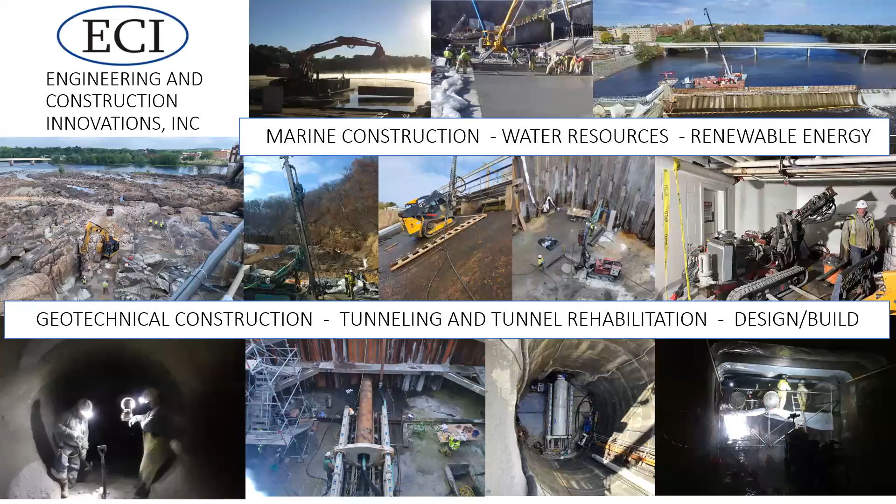So our presenters, Kurt Breitenbucher is a registered professional engineer with 11 years of experience. He received a BS in civil engineering and a master's of science in geotech engineering from Michigan Tech. He primarily works in trenchless projects, tunnels, and supported excavations across the country. Based here in Minneapolis, he's been with Brierley for about 7 years.

Sam Umlauf started his career in the construction industry working as a field inspection intern in central Wisconsin. After stops in California and North Dakota, he settled in Engineering and Construction Innovations, Inc. at the end of 2014. His focuses while at ECI have been design and construction of specialty geotechnical, marine, and tunnel projects with a basic intro to soil mechanics as his only formal, quote, classroom geotechnical education. Sam's geotechnical and geostructural expertise has primarily involved rolled up sleeves and dirty hands. So here, guys, please give it up for Kurt and Sam.

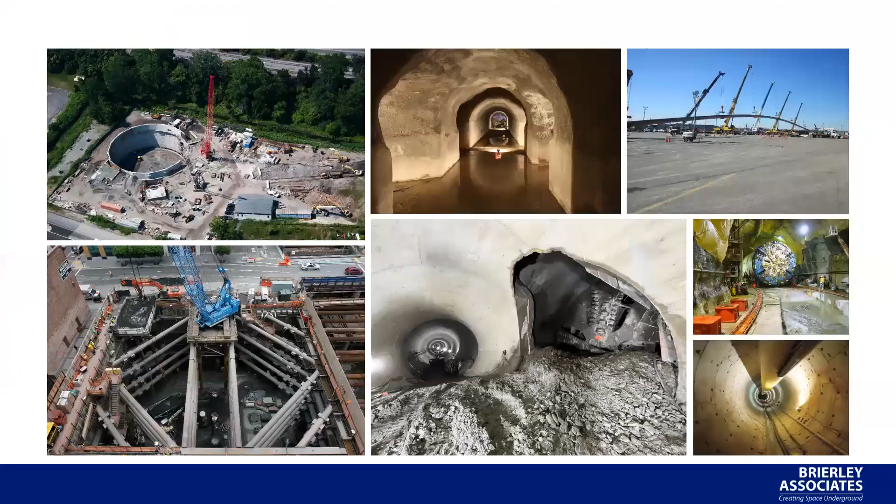I'm Kurt Breitenbucher, Brierley Associates. I was just asking Todd and Tom. They have been here in the Twin Cities about 10 years now. As they mentioned, I've been here about 7. We do a lot of the same things ECI does, but on the design or CM side. And once again, I won't go through all the pictures with you. We'll get to the presentation, but I just wanted to say it's great to see so many people out for the first one this year. So thank you, everyone.

So the title is the Upper Bee Branch Restoration Railroad Sanitary Sewer Interceptor Crossing, which is quite a mouthful. If you want to go to the next slide, it's a project that was born out of a much larger emergency project. The project team was ECI and Brierley. ECI did the construction. We were their designer. The owner is the city of Dubuque. I didn't put up a map showing where Dubuque, Iowa is. The owner's engineer was Strand Associates. I've got to give Eric Veith a shout out. He was great for dealing with submittal review, dealing with the railroad, dealing with the owner. He was fantastic. So next slide, please.

So the project background for this is basically, this is Dubuque. You can see here in the clay color, this is the Bee Branch watershed. It all drains down here to a series of channels, and then this is the Mississippi River. Okay, no worries. So, starting in 1999, they started to have incredible flooding throughout the area. They've had 6 presidential disaster declarations. It's up to $70 million in damage.

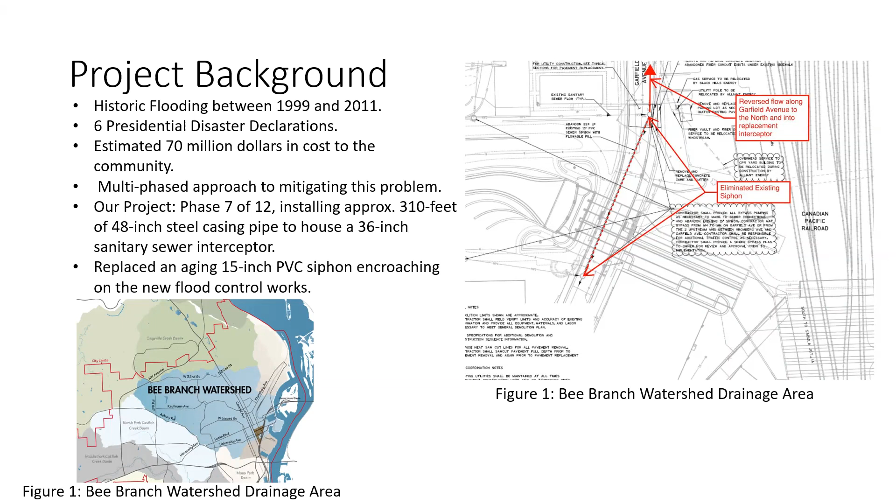It was about 310 feet of 48-inch steel casing pipe to house a 36-inch, was it Hobas? It was Hobas, yes. Hobas sanitary sewer interceptor. Next slide, please.

So just some of the project constraints. Again, this is the same site, but now it's the aerial. So this is one of those massive flood control structures that comes down through here, and then that other one is down here. The siphon would have been just through here. So we essentially reversed that flow, and the launching shaft, you generally want to tunnel uphill. So the launching shaft is going that way. So any sanitary flow will go that direction.

So you can see the launching shaft, 310 feet, built by slurry microtunneling. This is the receiving shaft. The image I was able to find, it had just been backfilled, but you can get a feel for what it was right before they fully abandoned it. So on the west side, we had Garfield Avenue that we had to keep open. We had this Canadian Pacific Railroad or Kansas City Railway facility, and you can see we tunneled fairly close to it.

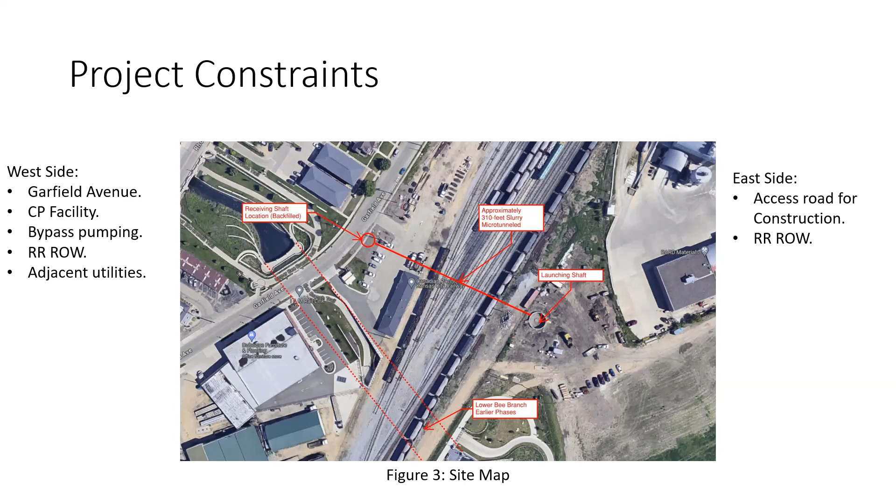Adjacent utilities, that's not uncommon. The railroad right-of-way, and then on the other side, it was actually pretty wide open. The only thing we really had to do was build a dirt road to get out to there. Next slide, please.

So one of the things that Brierley Associates did was, the contract documents required dewatering regardless of if you used it. So we designed dewatering. It enabled the ultimate design that we went with, which was a shotcrete shaft rather than a more conventional shaft. We had fine to medium grain sands, which is actually great for dewatering. The impermeable or cutoff layer was another 35 to 70 feet below us. So there was no way to toe in.

So we ultimately did seven 8-inch wells for the launching shaft and four 8-inch wells for the receiving shaft. We spaced them evenly. ECI drilled them in with a rotary drilling rig. They had 310 GPM pumps, so at 80% efficiency in the lifting head that we needed, they were all running at about 248 gallons per minute. And when I checked in with Austin, the field superintendent, he said most of them were pretty much going full tilt. So unfortunately, my caption is wrong there, but this is a cross section of the dewatering plan for the launching shaft, just to give an idea of it.

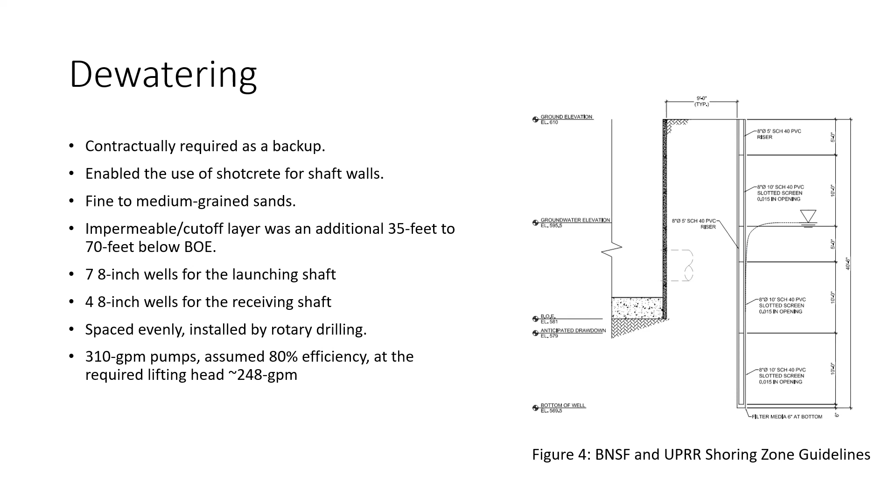Next slide, please. So one of the benefits of design was we avoided railroad review for schedule. We utilized the required dewatering, and there's another slide you might be more familiar with, but if anybody here is familiar with the railroad shoring zones, the first line is, I believe, zone A, second line is zone B. Zone B is you can do trench boxes, you can bench it, you can do whatever you want as long as it's safe. It's OSHA controlled in that location. If you cross into the other zone, you end up taking the full railroad surcharge.

So by going with a toe-less design, and again, you can see that this is actually the contract design, we were able to move the excavations slightly closer together. And I believe we cut off about 55 feet of tunneling. We brought it closer together. Next slide, please. So again, BNSF, UPRR shoring guidelines.

If you've ever dealt with them before, typically if you go into zone A, the one where you have to take the full surcharge, certain reviewers will make you treat it as a full distributed load for E80, which means if just the tip of your steel sheet piling goes in there, they say you have to put almost a 2 kip per linear foot, 2,000 PSF per linear, vertical distributed load on your shoring. So if you do it real back of the napkin, every foot you go down where you need that, you might add a whole additional size of sheet pile that you would need to take that load. So we did this to get out of that shoring zone and to actually get closer to it without having a toe.

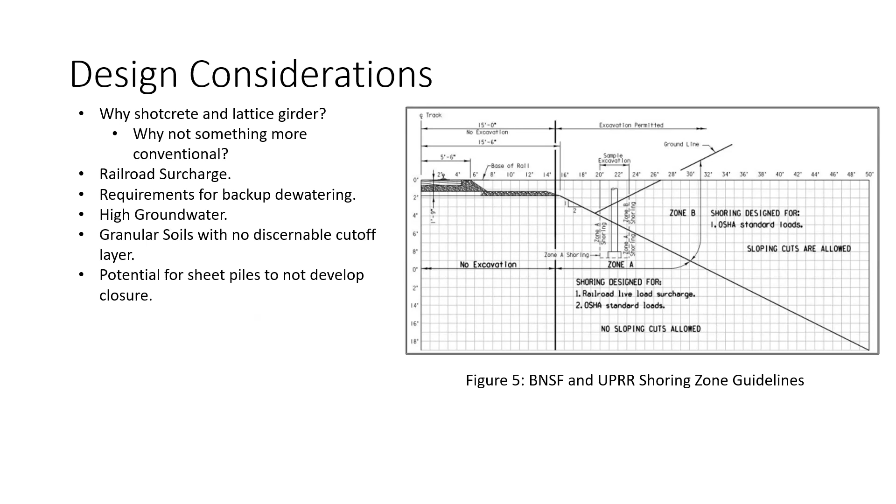Next slide, please. So some of the design considerations, there's different checks for shotcrete versus something like steel sheet piling. So what we did is in pre-construction, when they were just bidding it, we just did the real standard checks for shotcrete thickness with thrust, that sort of thing.

Ultimately, when we did the final design, we checked it for buckling, treating it like a thin-walled cylinder. We did a RISA model, and for the unbalanced load, we used that to figure out the moment thrust interaction because of the unbalanced loading from the surcharges for like construction or a crane or something like that.

As you can see here on the right, what we went with is a shotcrete shaft with lattice girders and welded wire mesh, and then at the bottom it was reinforced around the tunnel eyes. So at the top there, you can see what they did is they cast their footing for their fall protection, and then at the top there's a lattice girder just under that, and what they did is they pinned it back with soil nails so that they could excavate beneath it, because at that point there's nothing holding it up.

The second one, they basically excavated down the next lift, put the lattice girder in, and then they flashed it in with shotcrete. And then because of the mesh and the shotcrete and the fact that lattice girders are pretty open in section, it just kind of stays supported that way. So you can see there, they're excavating down after the first lift. The lattice girders are primarily there just for form.

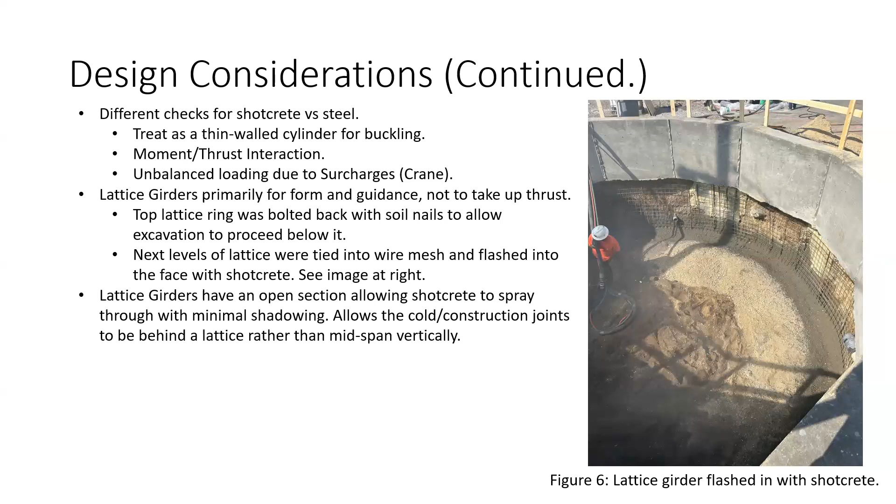They are a Minnesota-based company, which is fantastic. And obviously for us, it's great because these guys are local. If we want to ask them questions, run down and meet them in person. They'll run up to the cities and chat with people.

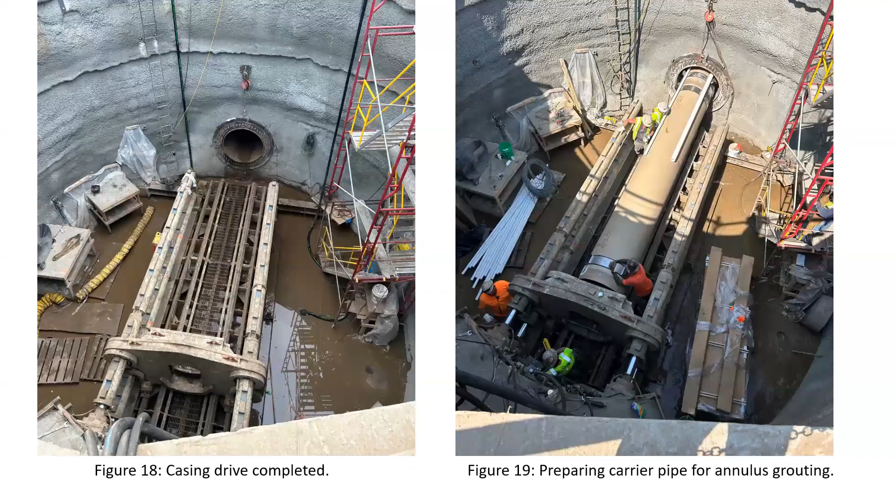So pipe all the way across, and this picture is the Hobas jacking pipe being installed. The total duration ended up being 5.5 days to microtunnel. We do run a 24-hour operation when we're doing the tunneling. The biggest reason is that we're avoiding any surcharges in jacking forces from any sort of collapsing soils that we could encounter. We can do our best to maintain that pressure on the annulus through some ports that are installed in the jacking pipe. However, the best insurance is to just keep tunneling, and then you're in complete control. Go ahead, next slide.

Back 1 slide. For those white pipes. Yeah, so the larger white pipe is actually a 4-inch pipe, and that was actually a fiber optic line. That was intended to be a directionally drilled fiber optic line. We hired a directional drilling sub. They had issues with their launch and their launch angles that the railroad was allowing us to use for the HDD. And so they were breaking the HDPE pipe.

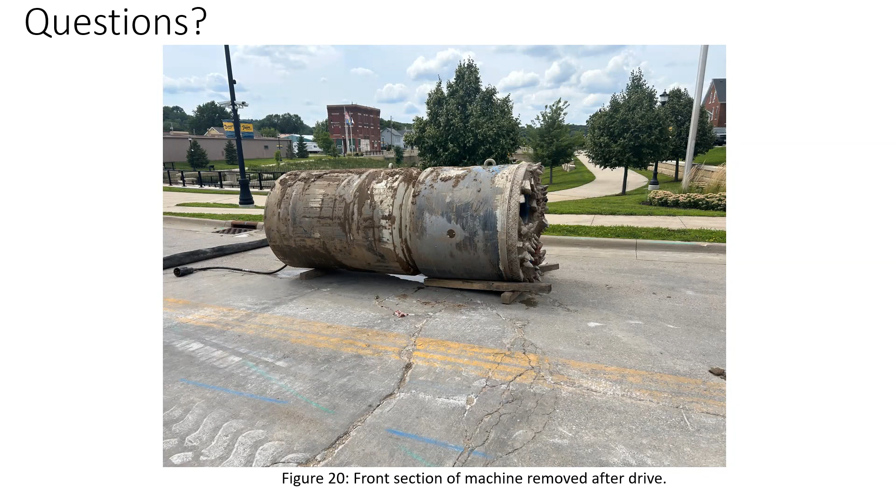Are there any ground monitoring requirements besides surface monitoring points, like extensometers, inclinometers, things like that? Yeah, so Kurt can probably talk to that. The question was about any ground monitoring requirements other than the surface monitoring points. Kurt hasn't answered any questions yet, so I'm gonna make him answer this one. Could you tab back to the one with the settlement monitoring points?

If anybody isn't familiar, when people typically do settlement calcs for these, as you get surface expression of most settlement, you get a trough around the tunnel, right? That goes out from either side. You get a trough here and a trough here. But what happens during construction is as the machine ingests material, you get, say, a couple face diameters ahead of it, a trough that's coming into the face.

And so, especially with something like this, where you have a little bit of a longer lead up to the railroad tracks, you would want points like that, like an extensometer, so that you could tell if you did have a settlement issue before you get to the tracks. Luckily for us, even these that were only 5 feet above the tunnel horizon barely showed any movement.

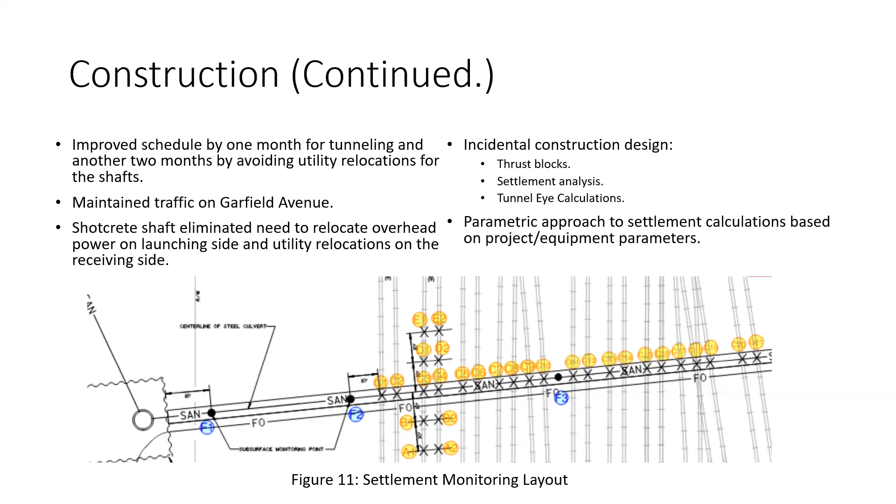There's the pipe. That's proprietary. You're asking how many we were getting in a 24-hour shift? So it took us about an hour to push a pipe, to actually tunnel the pipe, and then between loading it in, prepping, welding, all of those things, and then I think if you go ahead a couple of slides, and I hope I'm going the right way. Go one.

You know, just doing all the hookups and installations for those, that process ends up taking between 3 and 5 hours per pipe. So that's actually the longest part. The tunneling itself is the fast part. 310, and they did it in 5 days. 5 days, okay, I got it. But so between welding and doing all the hookups was between 3 and 5 hours.

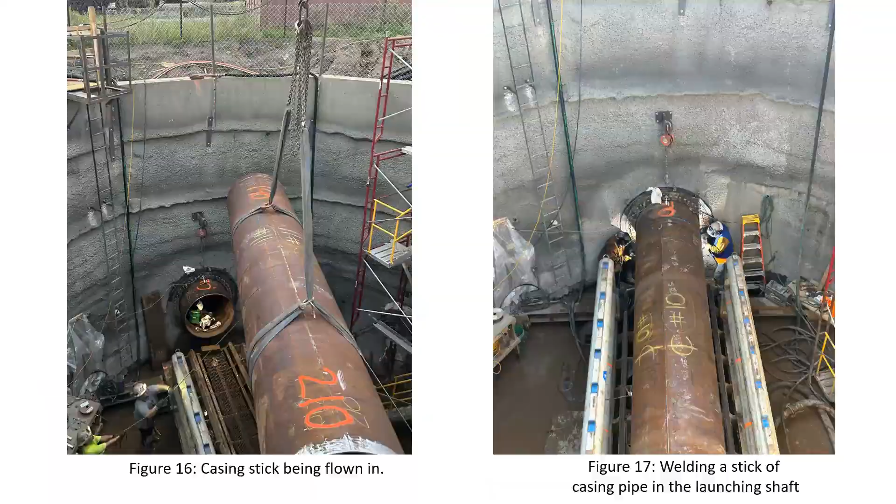Gotcha. So the shaft designs alleviated that issue. Yes. Okay. And you were asking about a seal slab. So they put down a seal slab just to have a nice working surface, right? But if we had done this and we hadn't carried it down further to eliminate piping or any of that, we might have had to do a big jet grout or tremie base plug, that sort of thing. And that's incredibly expensive.